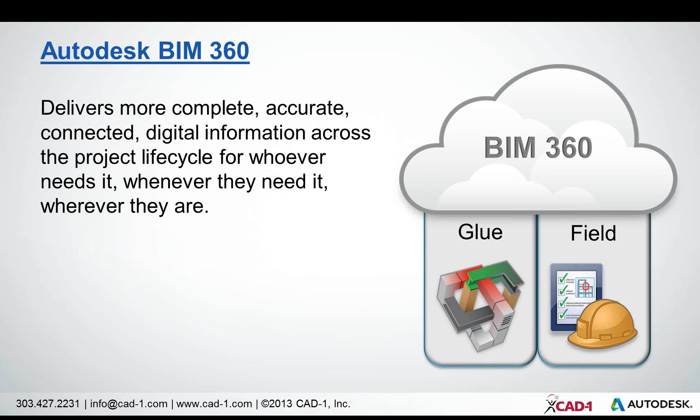So this is one of the questions we like to ask: how do you currently manage clash detection and collaboration during the design phase? Is it typical that you're using FTP, Dropbox I hear a lot, to exchange large BIM models? Are you exchanging Revit files, basically already using the cloud? But sometimes that's a very serial process that you send out a file, somebody downloads it, then they send you the update, and you download it again. This creates a lot of bottlenecks in the process. So how are you dealing with those challenges?

During the construction phase, those of you in the construction side of things, how are you dealing with the information that's being produced out there in the field? When somebody has an issue that needs to be recorded and distributed, how's that being handled? How are you handling your safety processes and safety inspections? How are you managing the quality control on the project? At the end of the project, how are you handing over all the information that you've been collecting throughout the construction phase to the client?

So we're going to start out looking at Autodesk BIM 360 Glue. So really what we're talking about here is two different services or products or tools that have different places in the project lifecycle. We're going to start talking about Glue, partly just because of where it lies in the project delivery lifecycle. Glue, as Stan had mentioned, can oftentimes be regarded as a form of Navisworks on the cloud. It's not exactly the same thing. It doesn't have the exact same functionality. However, it does use the same

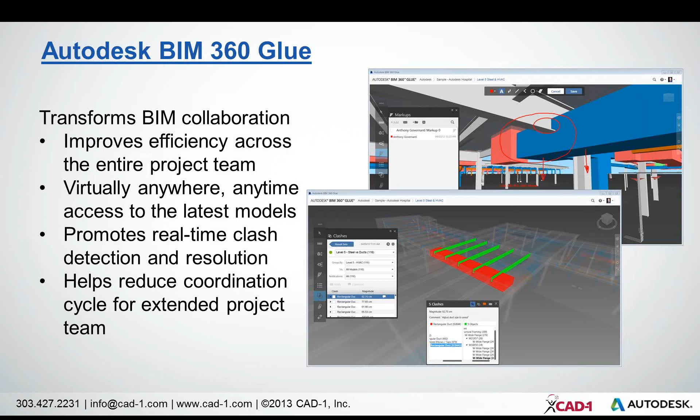Nothing spells a nice weekend getaway like looking at models and doing clash detection. The upside and the downside of mobile computing now, right? You can't always disconnect as cleanly as we'd like. All right, so let's take a look at. Oh, hang on a second.

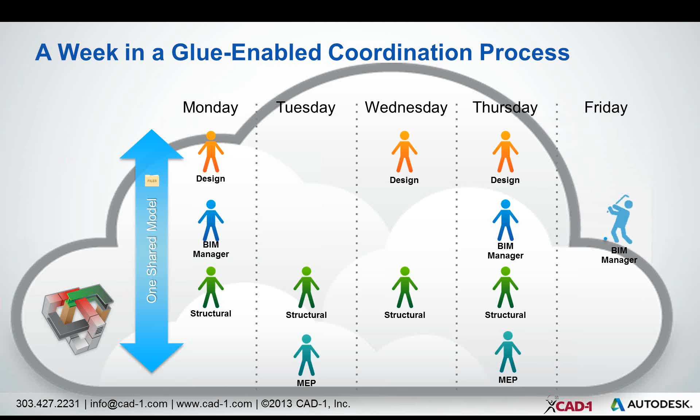All right, so one of the features of the BIM 360 Glue workflow is the BIM 360 Glue mobile app. BIM 360 Glue is two parts. There's a mobile app and there's a desktop app. You launch it from the desktop, and it's going to take you to a web-based interface, and they give you different functionality.

The web-based or desktop-based is going to give you all the tools. You're going to be able to go in there and do clash detection and view markups and more management level stuff. The mobile app, though, is going to be available on your iPad. It gives you access to these models almost anywhere. So as long as you have internet access, you can at least pull down the data.

And we have this great walkthrough feature where using the gyroscope, you can essentially move the iPad around. It's not quite to the point of augmented reality, but if you're standing on a site, you can navigate yourself to the same room within the BIM model as you are physically standing in, and you can actually navigate around. There's a gravity feature just like there is in Navisworks. If you've worked in Navisworks at all, this is going to be a familiar interface, a familiar way of navigating through the model.

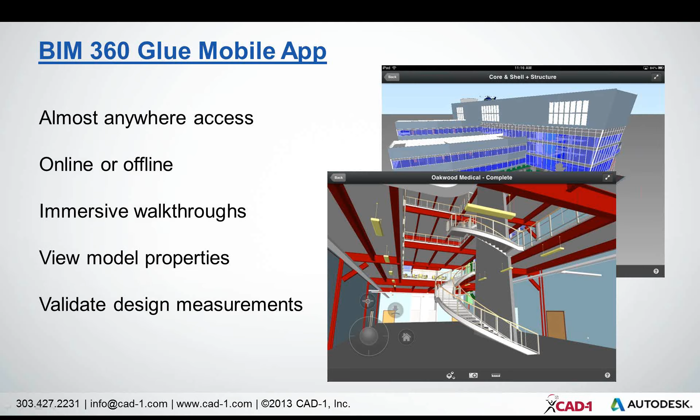All right. So, okay. So let's talk a little bit about what BIM 360 Field is.

Field is, whereas Glue is more going to be used primarily on the pre-construction end of the construction life cycle. Field is entirely for the construction phase.

The idea is to really minimize these manual processes that are typically and historically have been paper-based. We want to try and reduce errors in both human-made errors just by writing something down too quickly, or having bad handwriting, or just forgetting altogether to enter the data when the end of the day comes. So we're trying to minimize these error-prone manual paper-based processes.

I'll remind you that one of the people here in this office, and it's kind of a funny story, I'm not throwing anybody under the bus, but their spouse actually works in the highway construction industry and goes out with a marker and writes on the hood of his white truck. And then comes back and transcribes them in the evening. You got to laugh at that one. Exactly, so if it works, it works. But sometimes the hood's only so big, so there's only so much data you can get onto that.

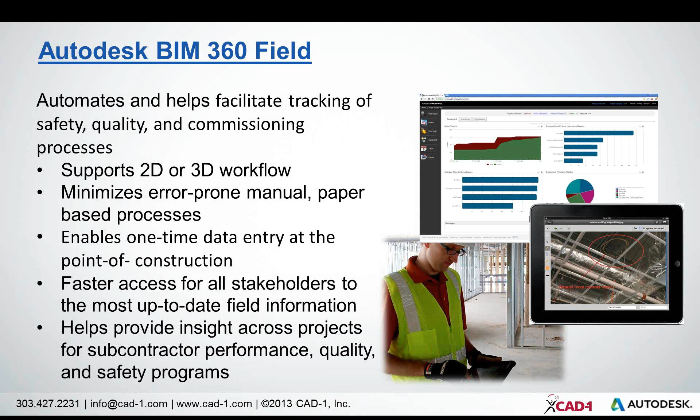Key performance, KPIs, key performance indicators is what we're talking about with the dashboard.

Not just the people sitting in the job trailer who have access to the pile of paperwork, checklists, and all that kind of thing until it gets manually entered into the system. It's not like that with Field. The idea here is that everything gets entered automatically or at a single time, and anybody can access the data they need when they want it.

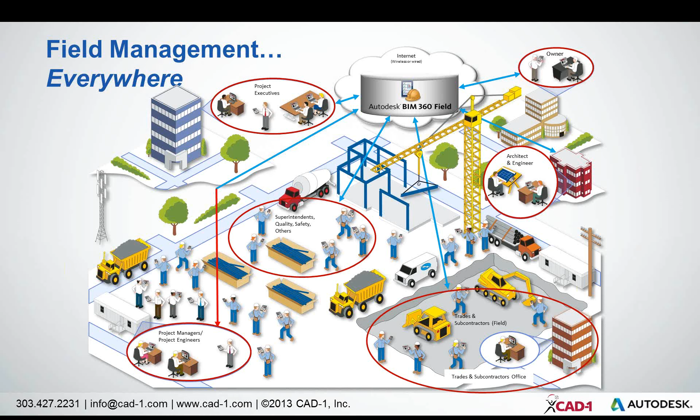You need to get a hold of the owner and the architect because you've spotted an issue in the field. Then bring them up - the whole project has access to this information. Call them up, ask them to log in, bring this up. Everybody can see the issue, hopefully get it resolved, and move on much quicker.

Absolutely, and we can check it if there has been an issue - maybe has it been resolved yet? We can track all that data.

So what is BIM 360 Field really? It allows for tracking of quality programs. Really, the main component here is we're talking about maintaining a quality program - this is a managed quality program. This is also going to incorporate safety programs. There are safety functions, safety tracking, and proactive safety programs built into the Field app.

Another very important component is bringing documents to the field. We saw with Glue that you're able to access a BIM model on the cloud pretty much from anywhere you have internet access, or you can take it with you. Within Field, you can also bring the important information, the important documents with you on the iPad.

There's a library feature that we can attach whatever information we need to. What we're talking about here is things like the actual construction documents - you have DWFs, you have PDFs, put them in the library. You have a project manual in PDF format, put it in the library. Cut sheets, installation instructions, put them in the library. Any kind of data that would ordinarily be sitting on somebody's desktop computer, or in a big old binder sitting on a shelf, we're going to put into the library, and bring those documents with us into the field - not by stacking a bunch of drawings in our arm, but actually putting them on the iPad, having direct access to them.

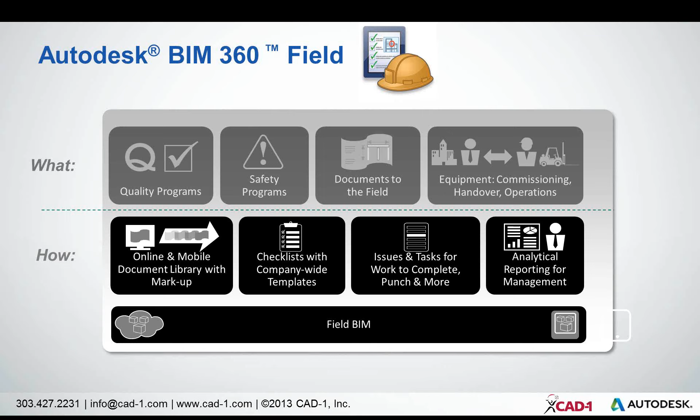And then this last component, analytical reporting for management. Those are the dashboards, I'm going to try and show you that here in a little bit. This is actually web-based, I'll show you that side of it. And then at the bottom there, they have the Field BIM component. That's listed separately because it is, I don't know if the term is an add-on, it's one part of a two-part solution here we'd want to talk about. But Field BIM is the BIM models, the BIM data, they're at your disposal within the app or within the library of Field.

Unmanaged QA and QC basically is going to lead to a lot of late project rework of problems. So early on in the process, when things are really moving fast, oftentimes a lot of the day-to-day stuff that needs to happen maybe is skipped over because there just isn't time. There's too much going on. Maybe it's just forgotten for some reason, or maybe it's just not necessarily.

It's up to each person. The communication doesn't get to somebody. Forgot to send an email, make a call. So as the project wears on, we start to run into a lot more problems, right? It's time to button up. We're going to start putting on the drywall, and we've got a lot of problems that need to be addressed.

Suddenly we realize, hey, there's a bunch of electrical fixtures or plumbing or something that hasn't been installed. How come? I thought somebody informed the necessary subs to come out here and finish stuff up. Well, oh, that's right. I made a note. I stuck it in the back of my clipboard, and it's still there. I forgot to go send it out.

All these kinds of problems start to rear their ugly heads late in the game. It leads to rework costs, potentially a missed deadline, lower profitability. We're going to lose money on this. It cuts down on the caulk-the-hell-out-of-it principle. Yeah. Beat it to fit and paint it to match, right?

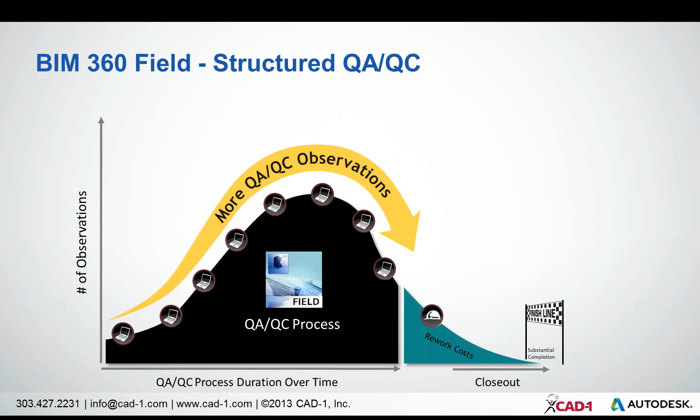It's going to significantly increase the likelihood that we'll make our deadline and potentially reap the rewards of bonuses, and really also lead to potential future work. When you can actually demonstrate that you have managed to employ this tool to consistently improve quality and time and budget on your projects, this is really going to lead to a lot of future work.

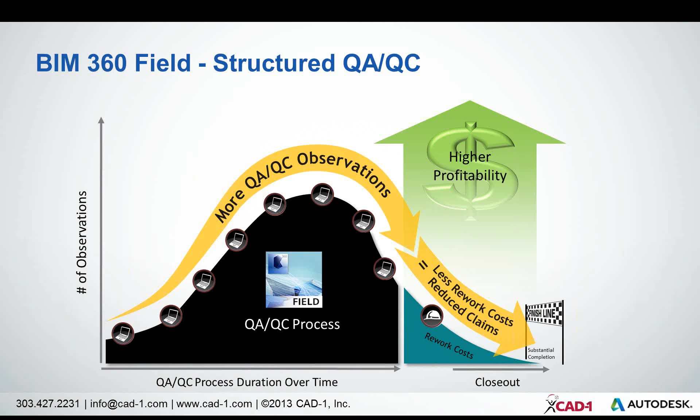Most of you have probably picked up on the theme by now that big red arrows pointing down are a bummer, and big green arrows pointing up are happy. Yeah, after the last few years, we're real tired of seeing big red down arrows. We want to see green up arrows now.

There's a safety component to Field. This is the traditional safety program. Now, I'm not going to say that this is a perfectly accurate model of how it's always gone, but oftentimes, safety is for the inspector. We know we're supposed to put on our hard hat, safety glasses, fall protection, hearing protection, all those things. Everyone knows what they're supposed to do for that personal stuff for the most part, but maybe it doesn't always happen.

What typically happens is there's an event, and it's obvious somebody's standing on a ladder improperly, whatever it is, and we're going to track those negatives when somebody violates the safety program and they get in trouble, they get notified of it. Somebody's not really sure how they're supposed to address some safety concern. What do we have to do? Well, we've got to go find the information. If we don't have it within our own team, how do we get it? Well, we've got to go find the safety guy.

And the outcome is that we don't drive good behavior. We can't really track the performance. Maybe anecdotally you're hearing that there's a particular issue commonly happening on the project, but if it's not actually getting tracked, then how do we measure what's happening here?

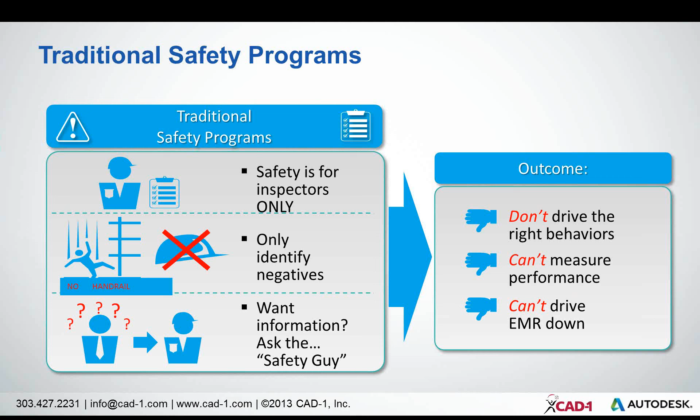Using Field, we have the ability to create checklists, and we can actually remind people that it's time to go perform a safety checklist, to go walk the site, make some observations. We can actually track both positive and negative. Because these are checklists, you can go through and say, yes, yes, yes, yes. We have the following 15 items. We have full conformance. Everybody's actually doing a great job.

Now we can actually see that we're doing a great job, or that we've got a routine and repeating issue coming up, because we then lastly have this reporting dashboard that actually tells us the outcome of tracking these. What have we seen and actually observed on site?

And of course, this leads to safer projects, which is always great. That's the primary concern, but it also can help reduce your insurance costs if you're having a significant reduction in hazards, and you can actually show that these safety programs are in place.

But the idea here is that then this last, I was talking about commissioning handover at the end of a project, transferring all the information that's been gathered during the construction process and modified throughout the construction process as issues came up. How do we then transfer that data to the operations end of the project lifecycle? 85% of a building's life is the actual operation. Well, it's very difficult to get all of that information handed over.

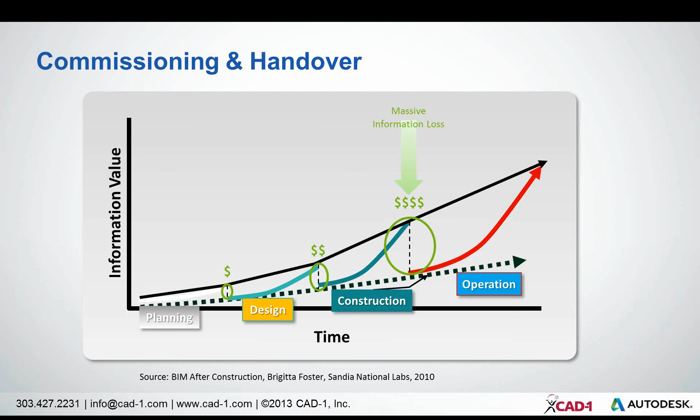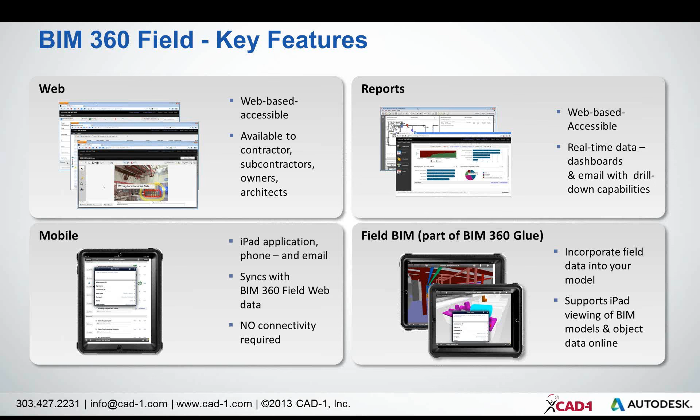You can get it there on the iPad. You can have it with you on site in the field. And again, that's the area where you do need to have that Glue and Field together in order to really use the drawing models and or the project models and so forth. Be able to see them and sync them with Field.